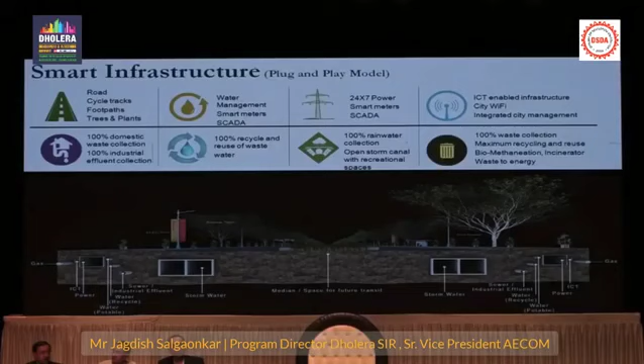So here's a snapshot of everything that we are building. This is a typical cross-section of our road. And there are two or three points I want to make here.

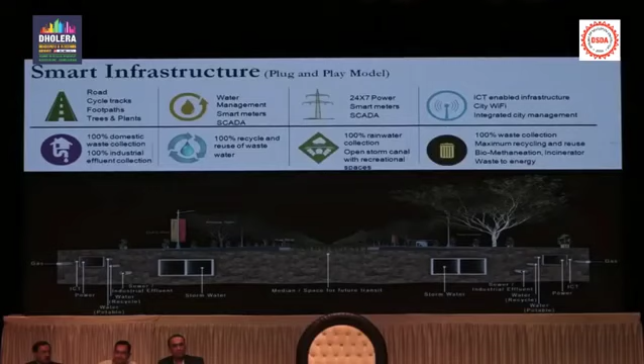Number one, first time in India, we are building all of the trunk infrastructure underground. Water, power, ICT, gas, wastewater recycle, everything is buried underground, even the power lines. I am sure you have gone to many cities, all of you.

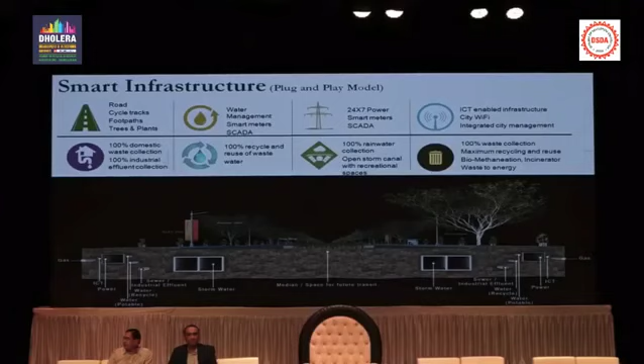In terms of different infrastructure, I want to give you the highlights of each component. In roads and services, for example, we are building almost 300 kilometers of lane kilometers of road - a total of 72 kilometers of road, but with multiple lanes, so we call it 300 lane kilometers of road. It's a completely traffic-integrated sensor system.

Each traffic light is going to have cameras, speed limits, and sensors. So all that information about devices being smart will be transmitted back to you, so you can make the decision of which road to take. That kind of information is going to be proactive, not reactive.

We also have dedicated cycle tracks. You can see how the cross-sections are designed, and this is the overall roadmap.

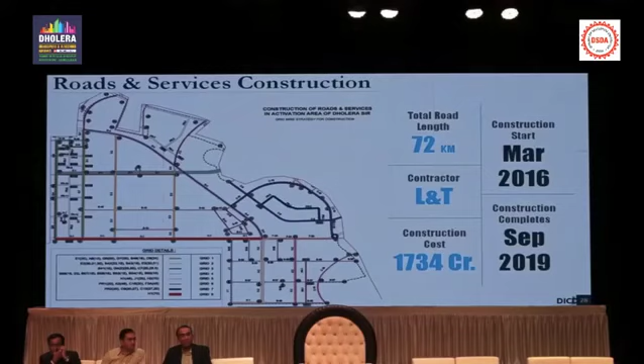It doesn't work on the screen, but that line coming from Dholera village is road G4, which is being built right now. I'm sure anybody who has gone to Dholera can start seeing the city beginning to take some shape and form.

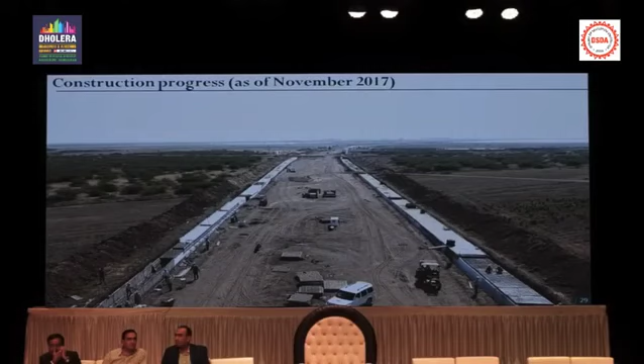So everything underground is built. Slowly it has to come up, and most of you know that Dholera is a very difficult area for construction because the soil conditions retain a lot of moisture. So you have to dry out the moisture and compact it correctly, so the roads will last 30 or 50 years. That's what we are doing right now, building these roads.

In terms of power, like I said, it's a completely underground transmission system. Power is going to be available in March 2019. Right now, we have invited private companies - both Torrent and Adani are applying for the license with GERC, and GETCO is building the transmission line. Both of those components will be ready by March 2019, the latest, or even sooner.

Then in water, which is by far our smartest component because of the technology, we have quality meters so you get the best quality of water. We have district metering on water, smart meters, as well as a leak detection system. This is another component which, to you as consumers, is going to save a lot of money.

Leak detection is a major problem in all the cities in India. For example, in Mumbai, about 34% of the water that's produced and paid for gets lost or stolen. In Ahmedabad, about 17 to 23%. And who pays for the lost water? The existing customers pay, right? Because it's loaded onto your cost.

In Dholera, we will not waste more than 5% of water, and that's only because of evaporation, transpiration, and whatever is required to wash down the machinery. The rest of the water is going to go back into the system. That means higher efficiency, lower cost.

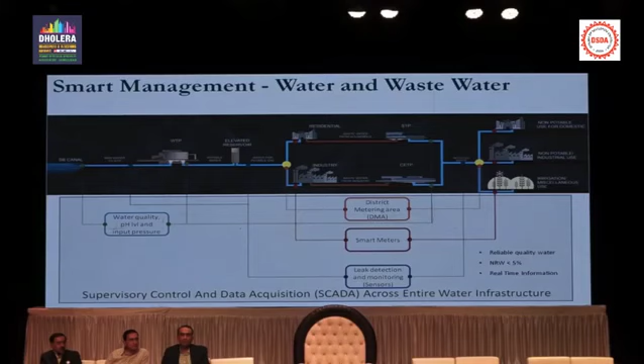All the points I'm making are that we are installing all these smart features not just to increase the cost, but because eventually the consumer is going to pay less in the long run - because all we look at is life cycle cost savings. That's what we look at.

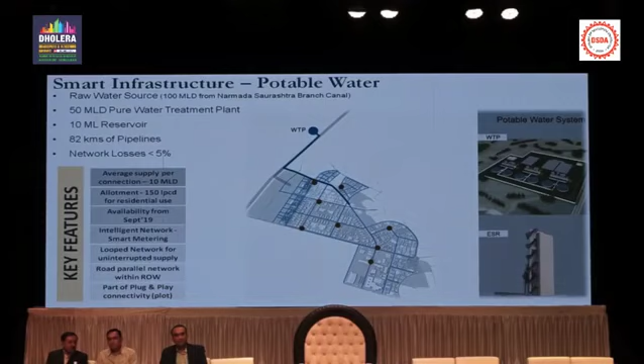In terms of potable water, we are bringing in 10 MLD of water immediately, and it will be ready by March 2019, or maybe June 2019. And again, everything is smart metering - I think it's the same system.

Recycled water is another unique aspect of Dholera - we have 100% recycling of wastewater. I think this is probably the first city in India doing 100% recycling, and all of this wastewater is going to be used for industrial water use.

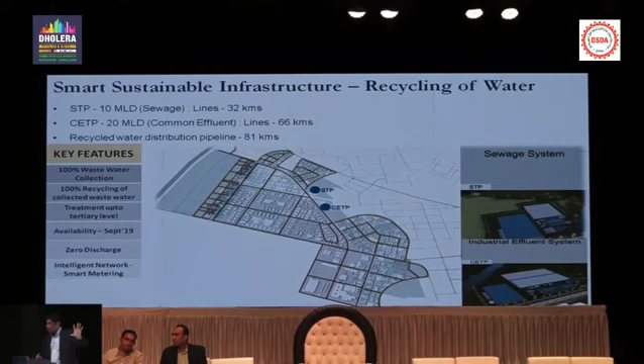So we are maximizing sustainability. We are promoting water savings - Gujarat is a water scarce area. For all of these different things, I'll show you the kind of accolades and awards we have won later on. This has been recognized all over the world as the best place in terms of technology and utilities.

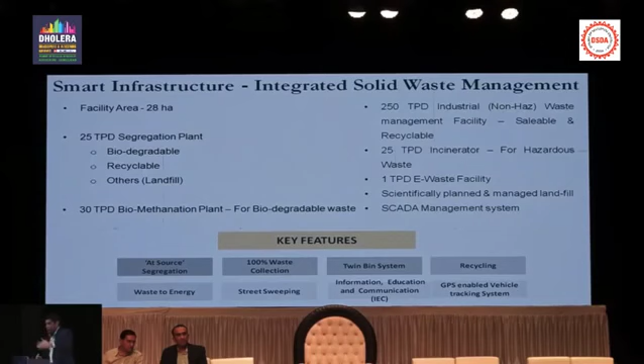In terms of solid waste, it's door-to-door collection. Everything will be collected in separate bins - 100% recycling, composting, biomethanation, gas production. All of those things are planned, although solid waste will take some time, because as people come in, you generate garbage - you don't need it on day one. So about maybe 2 or 3 years down the road, we will do that.

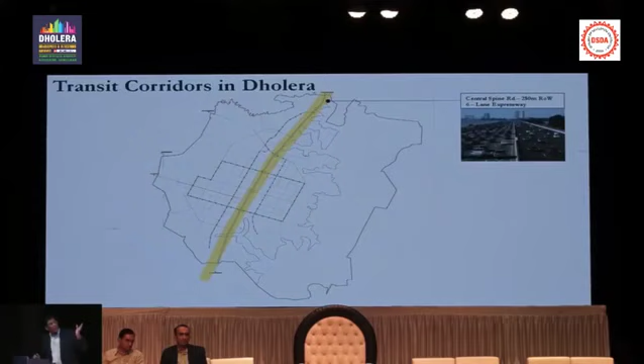Okay, so that leaves us with the infrastructure components. Now let me get into the urban transit and livability aspects of Dholera. So far we have talked about businesses and infrastructure and utilities. So this shows what we are planning from a transit standpoint for Dholera.

Like I mentioned earlier, there is a metro within the expressway. The yellow line is the expressway, and there is a metro that's going to run from Ahmedabad to Dholera. It's currently on the JICA funding plan for 2019. Then there is a light rail system planned, shown by the green and blue lines.

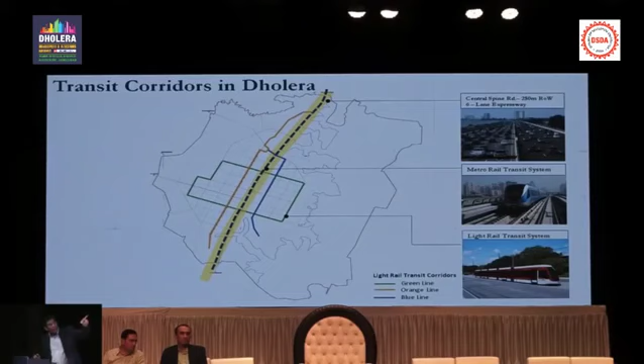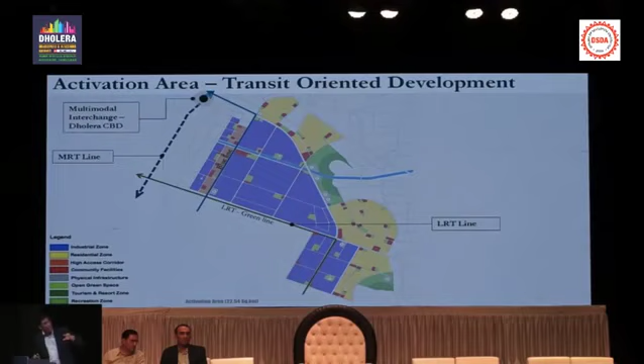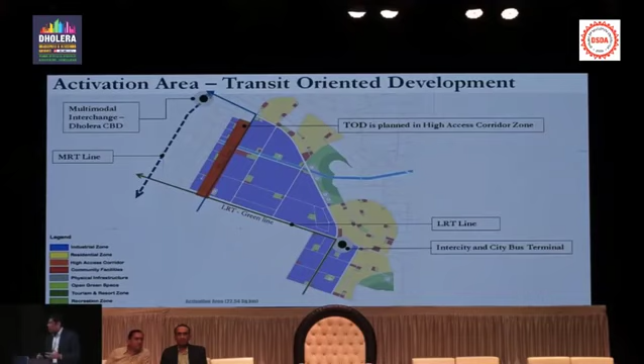I also wanted to show you the transit-oriented development we are planning, where the metro is coming on this line. You've got the green and blue light rails, and then the bus terminal, and this orange patch we show is our high access corridor. The high access corridor is mixed use development, high FSI, and it's going to be like what they would call the downtown - a transit-oriented development where you will have all kinds of businesses, commercial, and residential development going on in one place.

People routinely confuse flooding and flooded area with inundation - that is a technical difference between the two terms. Inundation means when water has nowhere to go because it is so flat that it has the inability to drain.

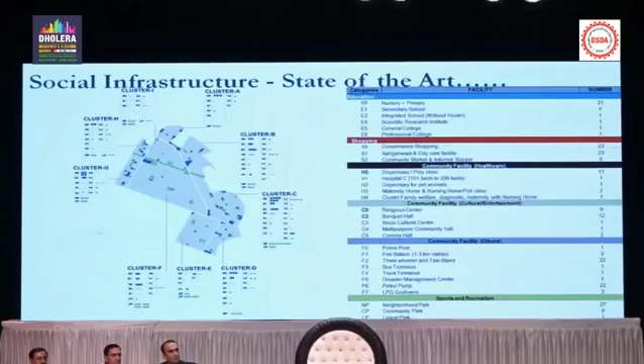So you can know exactly, if you are planning something in Dholera, where all the social facilities will be coming up. I talked about the canal earlier, and we see great opportunities in the canal, particularly for me, coming here to Dholera and designing a brand new city. I always notice when I'm in India the sense of civic sense - pride for our community, art and architecture.

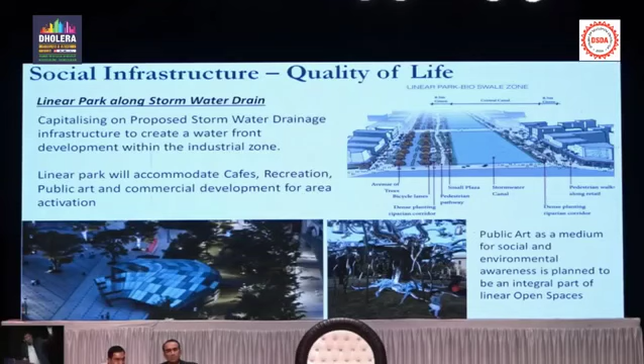I don't know, for some reason, today's generation doesn't give it a lot of value. So we are trying to bring that back through this whole canal feature, where we may have art and artistic expressions. We may create zones that will allow people to showcase their art, culture. We may create zones where we can demonstrate Swachh Bharat and some of the other national initiatives.

So we are trying to create an environment where family is just as happy as businesses, where we have a lot of open spaces, a lot of parks with good kindergarten schools, good school education, good public hospitals, public facilities. So all of these things are pre-planned. Now all that we need to do is get this tremendous audience interested and start building, right?

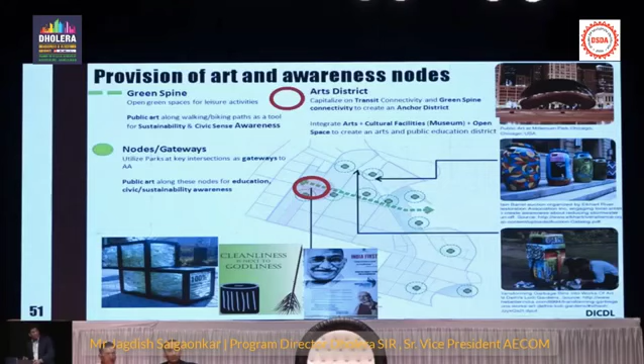Ahmedabad uses a miniature version of this now. They have a police command control center. Surat also has one. But for a citywide system, nobody has one yet. So Dholera will be the first one.

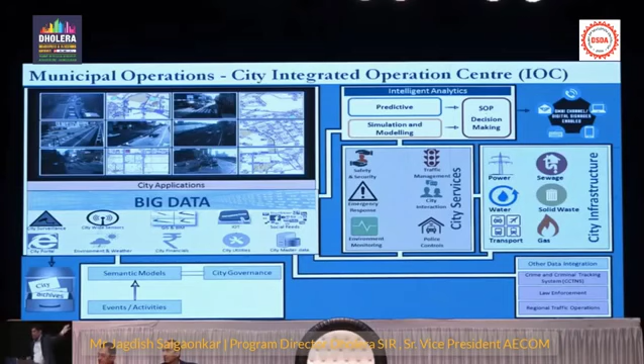And what I mentioned earlier, this whole cycle of gathering data, bringing the data into the control room, writing the computer algorithms and the analytics to give you the knowledge to make smart decisions, is going to happen here. This is the brain of the city, which is going to reside in the SPV building. You saw the building earlier that's being built.

Smart governance, which is again a wireless form of government. Nobody in today's day and age should be required to walk to City Hall or city offices to get a driver's license or pay your fees or bills. All of that will be online. You should be able to do it on mobile, you should be able to do it on your laptop. Everything will be online, and this is going to be built in.

This is already being done in many places throughout India, because this is the easiest place to convert a brownfield city into a smart city. So a lot of the brownfield cities are already doing this. But for us, it's a way of life in Dholera. It's going to be part of our...

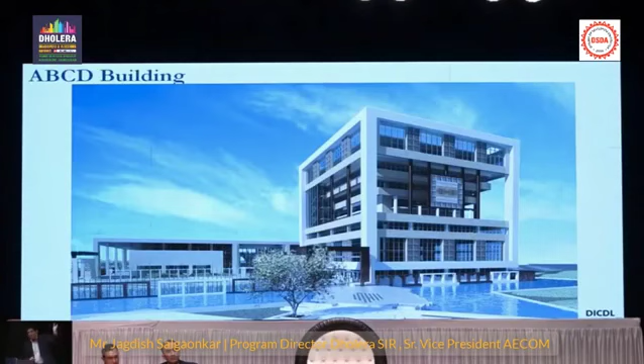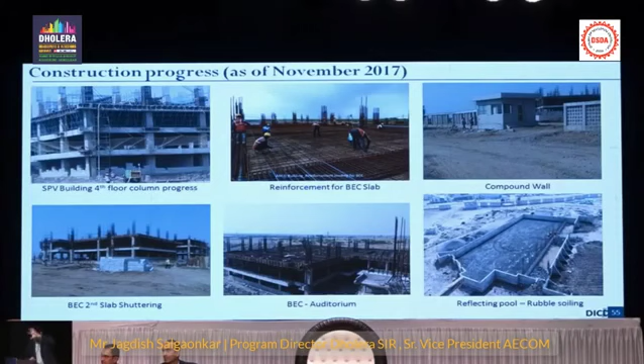And this is the ABCD building. I mentioned this is the construction that's already going on. You can see some of the pictures there. I think the video that was shown earlier on was a fantastic video that showed you some insights on the construction that was going on.

So probably of most interest to all of you is, what are we selling, when are we selling, and for how much are we selling? So you can all do your businesses, and I see a lot of crorepatis in here in the next few years.

This is all of the zoning that I mentioned earlier. Blue is industrial. The same thing you can see on the right-hand side is all of the plot sizes. So we have 0 to 5 hectare, 25 plots; 5 to 10 hectares, 17 plots. Now those plots are owned by the government. There are many, many private players in the activation area. We have not listed their plot sizes yet. This is only what the government is selling right now.

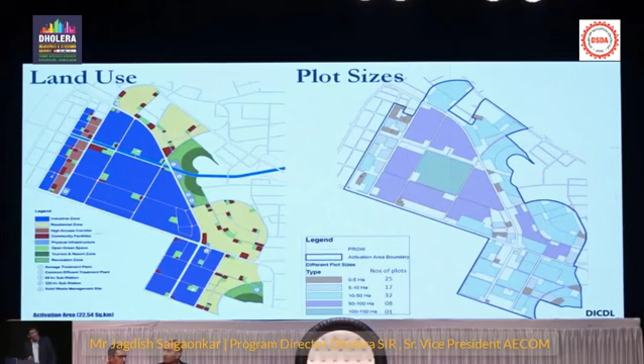This is what we are targeting our audience, which is the industrial clients that we are selling to. We have also advertised heavily for selling our land. We have made a commitment that of the initial 5,600 hectares, we will give allotment in 17 days and possession in 90 days. This is by far the fastest commitment we have made. This is our commitment to efficiency and transparency, and our complete land allotment system is online.

Anyone here can go online right now, that's the address right there. You can go online, you can select the plot, you can click on the plot. It will give you the information on the plot, what the dimensions are, what the setback is, and you can make an application online.

That application online goes to our general manager, Dilip Brahmbhatt, who's sitting right here. He then processes it and puts it up to the MD for approval. There is a land allocation committee that votes based on the businesses.

If the industry falls into one of the categories we really want, which is the mega investment category, there are several formulas for that, and we offer several incentives and discounts. A lot of industries are talking to us right now, and they are all looking at it. As soon as we get a little bit above ground, I think in the next 3 to 6 months, we should have some idea of who our anchor tenants are going to be.

These are the industries we are targeting: defense, general manufacturing, and heavy engineering are our top 3 priorities, for the simple reason that all these industries require the largest amount of land for their businesses.